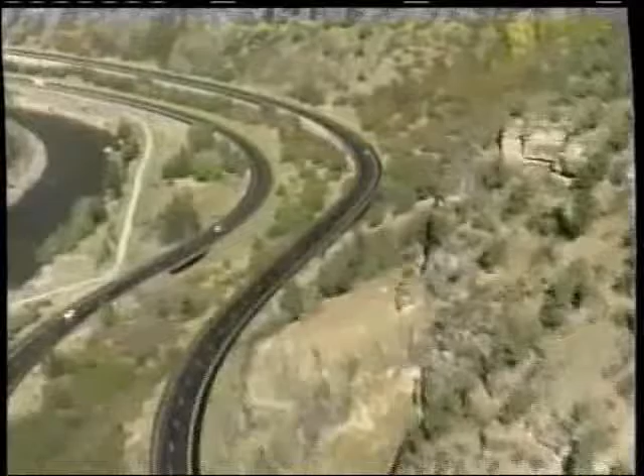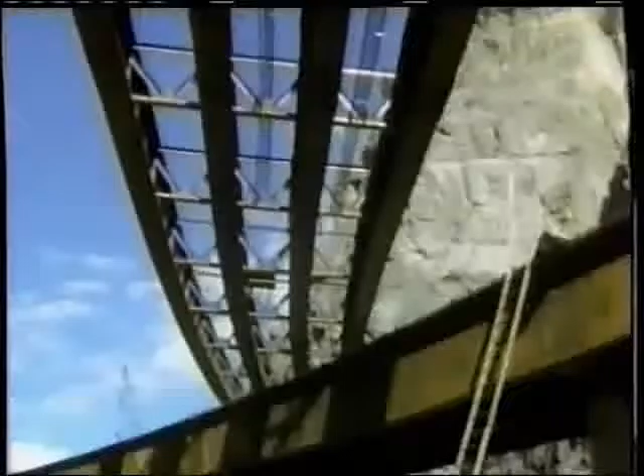Some of these technologies were developed on the Glenwood Canyon I-70 project, which I managed for 12 years. Under my leadership, we aggressively developed and implemented innovative solutions in many areas. Traditional methods and materials would not have allowed us to construct this award-winning project.

Technology does not stand alone. It requires professionals for implementation, problem solving, and continual improvements. We call these specialists subject matter experts. Adoption of new technologies requires support from an enlightened management. We will show you in this video how your agency can both save money and provide better service through internally supported MSE technologies. First, let's look at why agencies are not already implementing these MSE technologies.

There must be reasons why we're leaving over hundreds of millions of dollars on the table each year. There are reasons, and these include the human tendency to resist change, to preserve existing paradigms. Technologies, however, are never static. From the beginning of history, man has pushed the limits of his ability.

In transportation, we began on foot. And then we domesticated animals to carry us farther and faster. We continually improved the efficiency of horse-based transportation and reached the apex of that technology with the stagecoach. We drove the horse to its limits of power and speed. Technologies reach conclusions. There are indeed limits on the envelope. Technologies continue to evolve. New methods and materials replace the old.

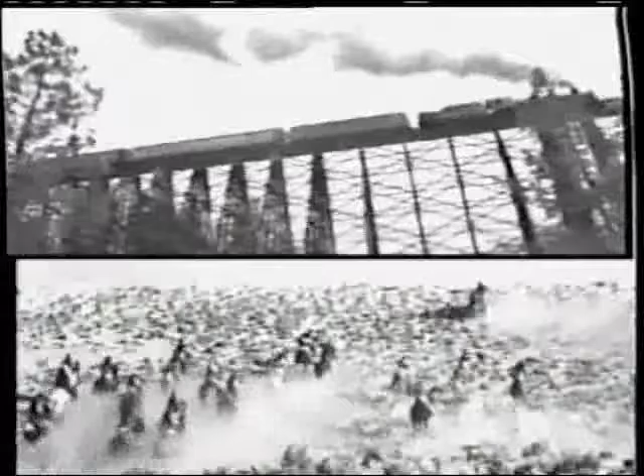The steam locomotive replaced the horse. However, the stage driver was not automatically a locomotive engineer. This analogy illustrates a paradigm shift. Accepted practice in transportation changed dramatically and forever with the introduction of the steam locomotive. A similar technological evolution is occurring in retaining features. These old workhorses are ready for the stable.

Externally supported retaining wall systems are being replaced by internally supported earth-reinforced features. And just as in any major paradigm transition, technologists, subject matter experts, must evolve to advance the new paradigm. Our state DOTs are collectively losing hundreds of millions of dollars each year because they do not have subject matter experts in responsible charge of selection and design of MSE features.

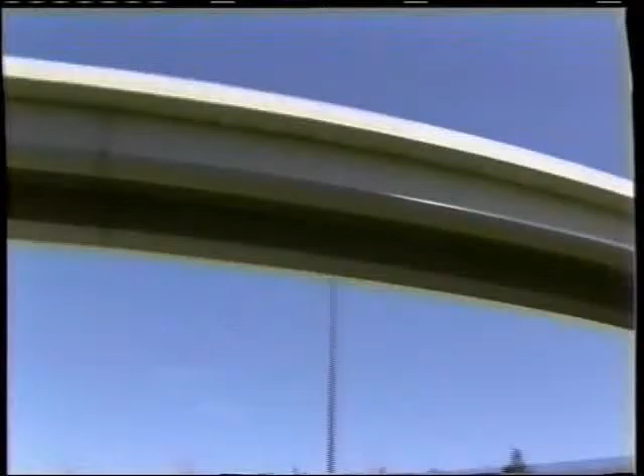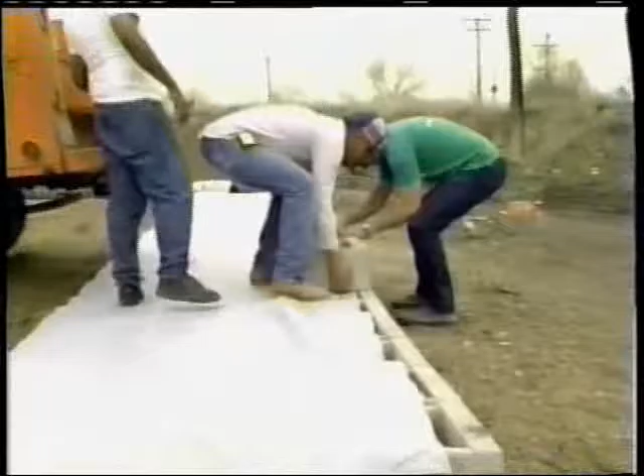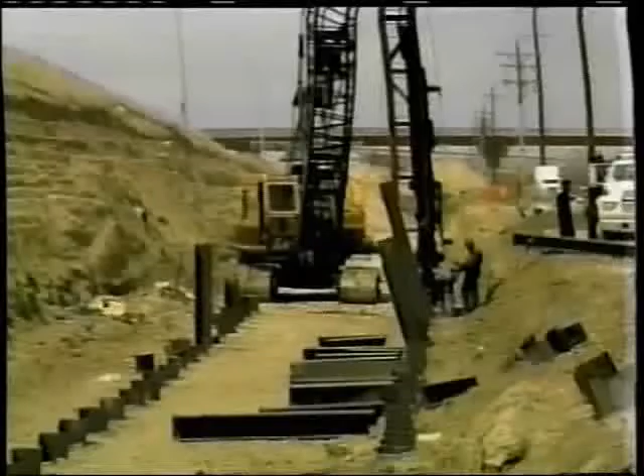State DOT engineers routinely design and supervise construction of these magnificent monuments. Yet few state DOTs can design or support construction of these basic retaining systems. Instead, state DOTs often rely on yesterday's technology or proprietary systems. Here is a cast-in-place wall on piling that cost over $70 per square face-foot to build. A CDOT generic MSE alternative designed in-house would have saved hundreds of thousands of dollars on this project.

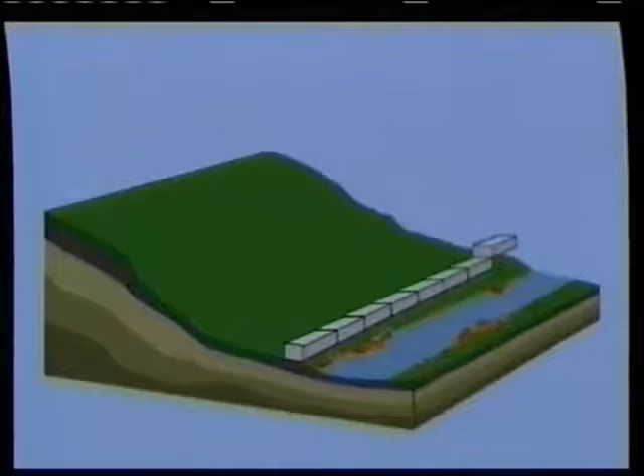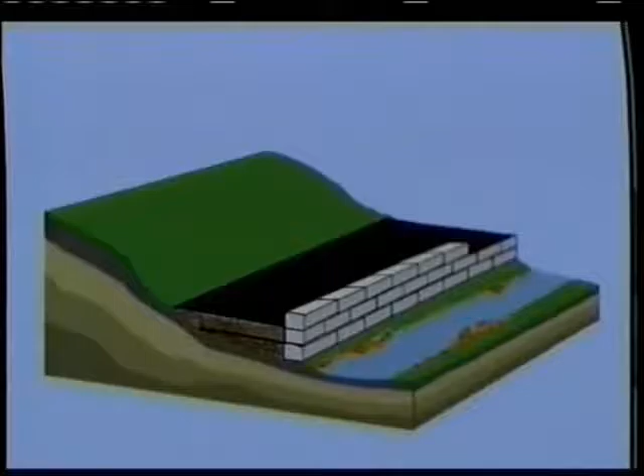These kinds of wastes of public funds become less tolerable as state DOTs realize just how simple the CTI MSE technologies are. There is nothing special, nothing difficult in design and construction of the basic CTI MSB system. Facing can be as basic as a concrete block. The typical backfill is road base. Reinforcements can be steel strips, wire mesh, polymer grids or sheets, any durable material. CTI generic MSB features are the future in wall and slope technologies. The sooner our state DOTs develop internal design and construction expertise, the sooner we begin saving money.

CTI can teach MSB technology to transportation agencies and assist in developing subject matter experts. We have internationally recognized instructors and the finest course materials. The course is designed for engineers who have no formal training in advanced soil mechanics. What we ask of the student is a willingness to learn a new technology and a commitment to use it.

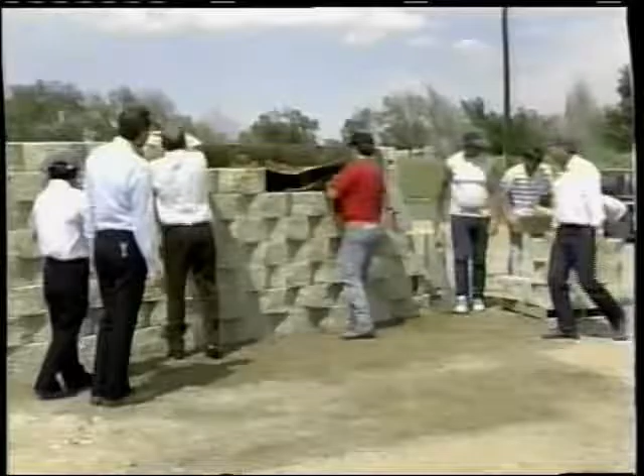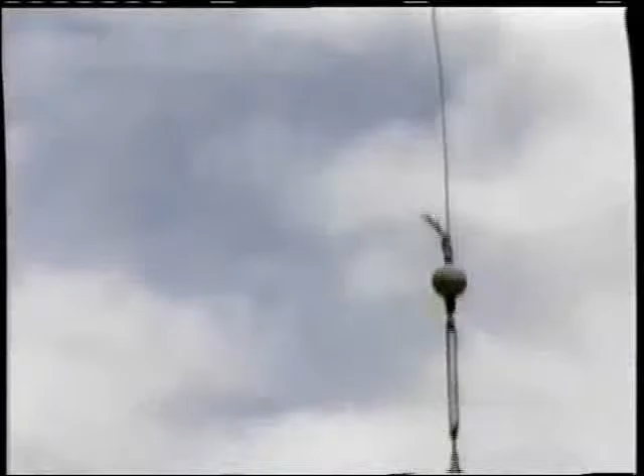This is a CTI MSB generic modular block test wall. We're using this wall to demonstrate the principle of internal stability. On this CTI MSB generic modular block wall, we used two types of facing blocks. We added a surcharge and we cut the connections between the blocks and the reinforcements.

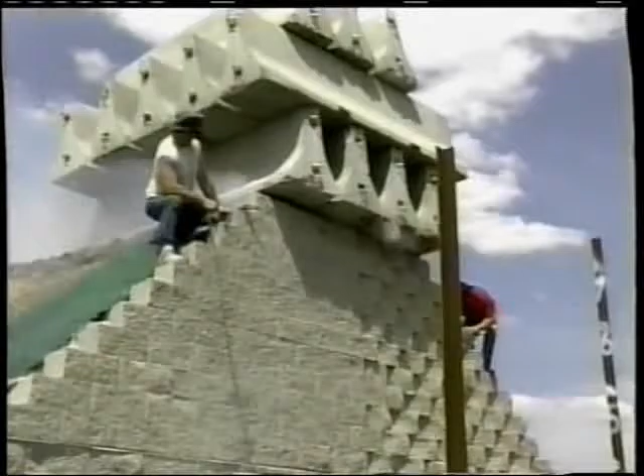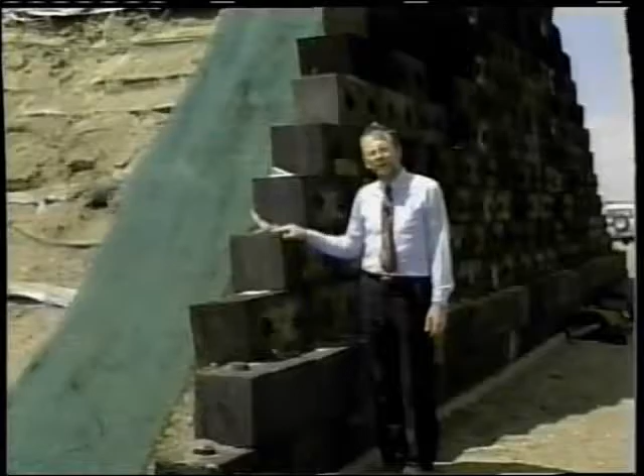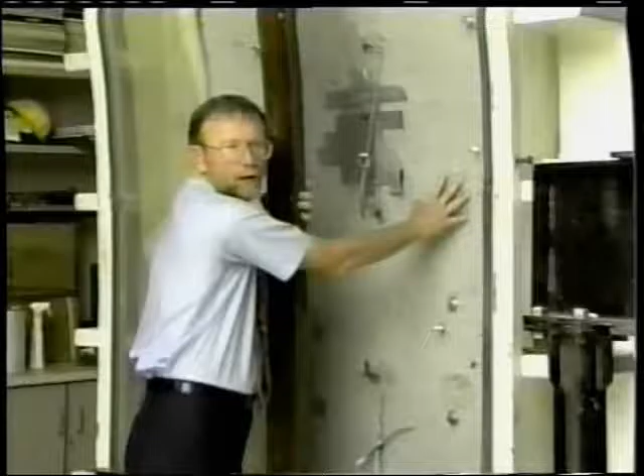This is another demonstration wall. These blocks are made of recycled tires, and they're light, they float. We also cut the connections on this wall. This is our full-scale retaining wall test frame at the University of Colorado at Denver. Here we construct and test CTI MSB retaining walls. The current test includes a full-height concrete panel facade with shredded tires as backfill.

This is our full-scale landslide simulator. Inside, we construct landslides and test various remedies. The current test is a new concept we call the CTI Patch. It consists of a negatively battered fabric wall and tire shred backfill.

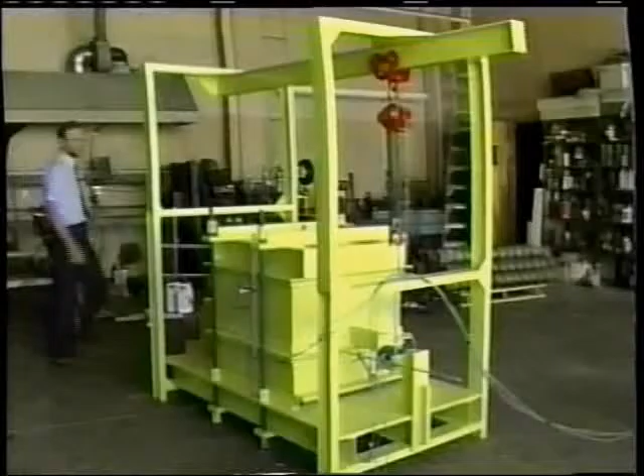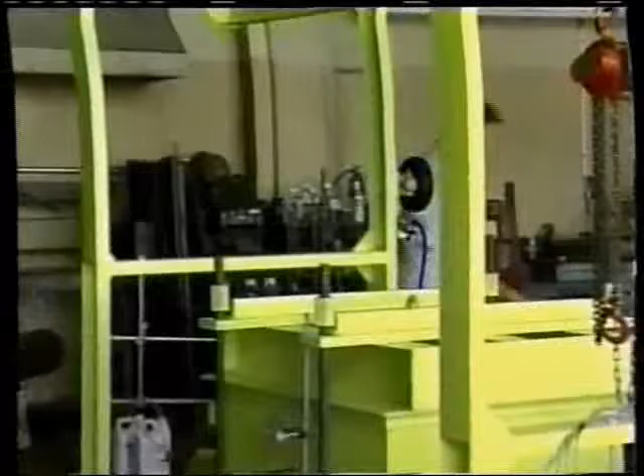This is our direct shear device. It has 30-inch boxes, which allows us to test a variety of backfills, including shredded tires and sawdust. We can also test the interface between reinforcements and backfills. This is a part of the CTI test frame where we test the connection strength between the modular blocks and the geosynthetic reinforcement.

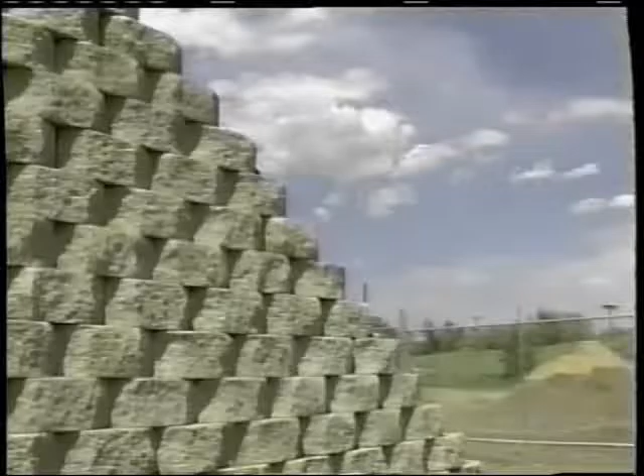What we have learned over the past several years is that CTI MSE technologies are the future in walls and steepened slopes. They represent the next generation in technology. CTI generic MSE systems are simple to design and easy to construct. Let's look at a basic system.

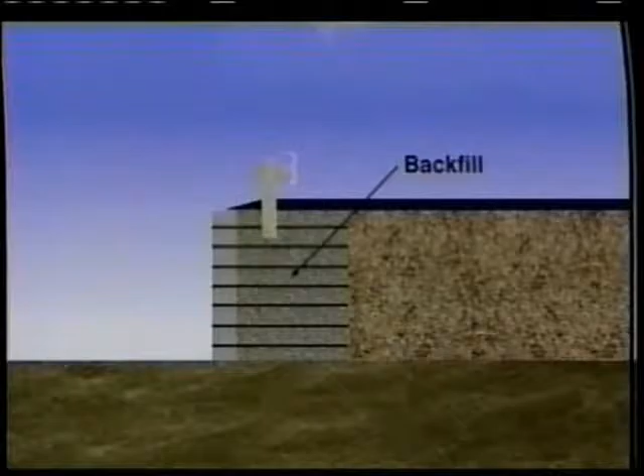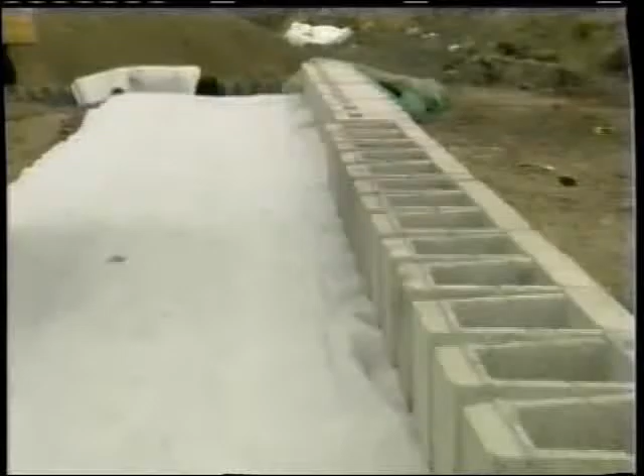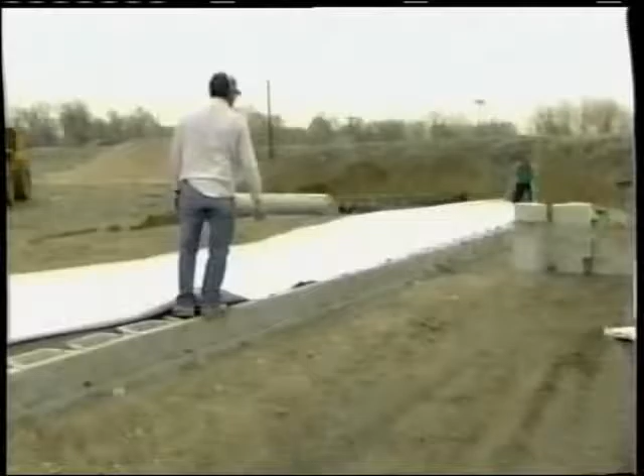Backfill is a granular soil. Road base is a good choice. Everyone knows how to build with road base. The easiest facing for construction is a dry cast modular block. Geosynthetics can be used for reinforcement. Placement is as easy as it looks. Geosynthetic strength, spacing, and dimensions can be determined from the CTI design charts.

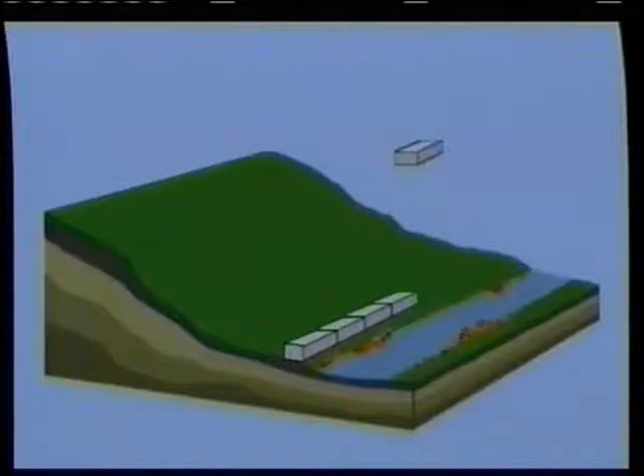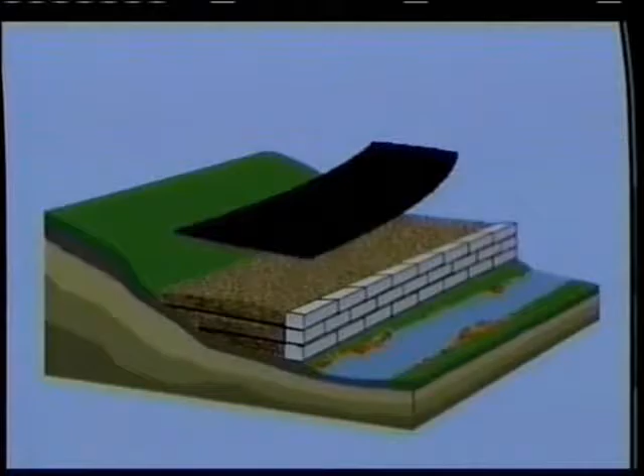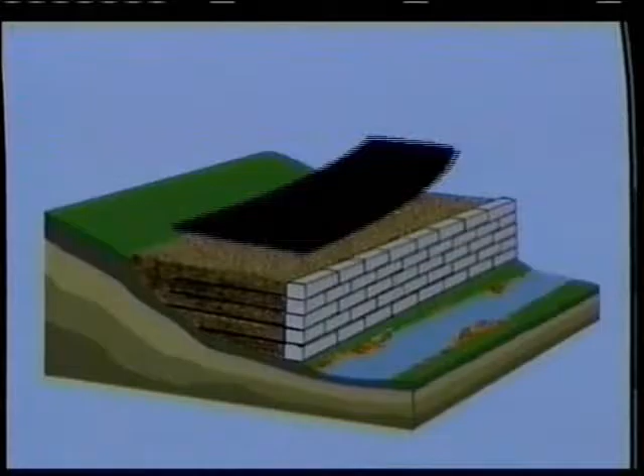Full-scale testing by CTI shows that this composite of backfill and reinforcement is 20 to more than 50 times stronger than the forces that drive internal failure. High-end geosynthetics have half-lives of several hundred years. Dry cast concrete blocks can be designed to last at least 75 years. And road base is certainly a durable construction material. Safety, longevity, and simplicity are the hallmarks of the basic CTI MSE generic modular block system.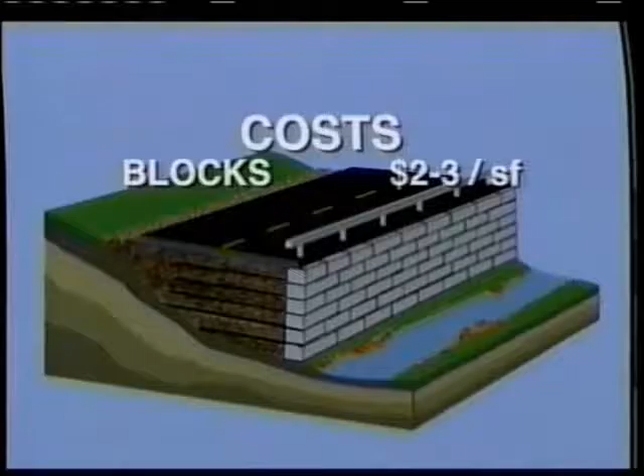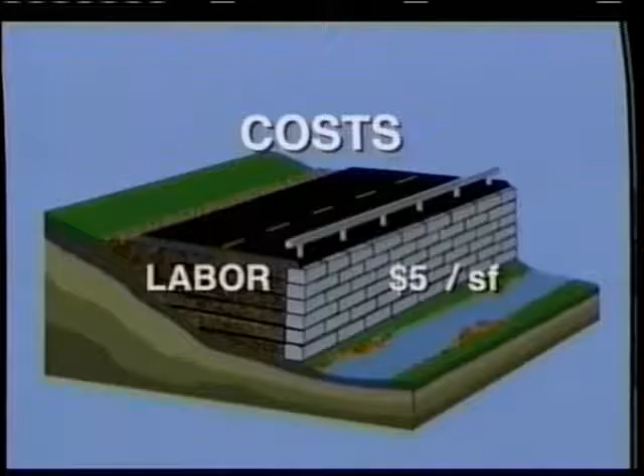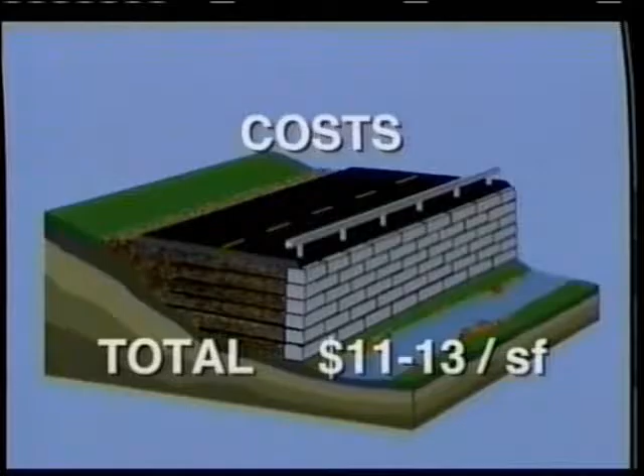Costs for this basic system are quite reasonable. Modular blocks cost $2 to $3 per square face foot. Reinforcements usually cost $2 to $3 per square face foot of wall. Granular backfill is about $2 per square face foot. Labor varies with location, but $5 per square face foot is a fair average for construction costs. At $11 to $13 per square face foot, the CTI MSB generic wall is one of the least expensive systems in the country.

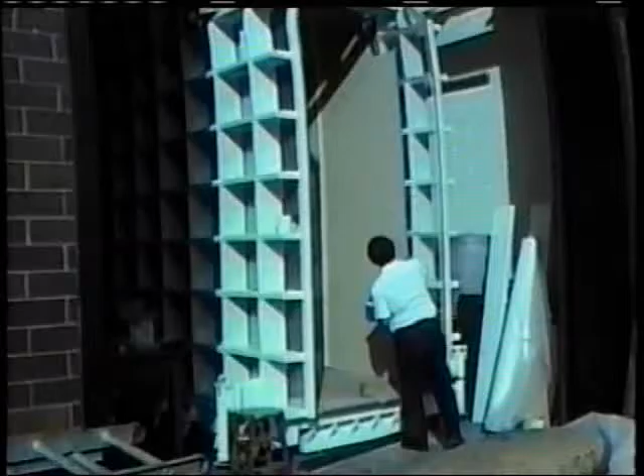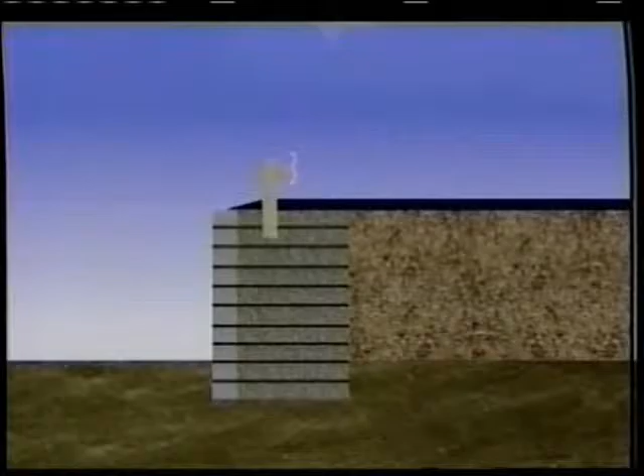The cutting edge of the sword of economy is honed with research findings from CTI and by in-house MSB experts at the beginning of project development. Let's look first at how research has improved the economy of the CTI MSB systems. One of the first discoveries was that internally stabilized features do not require embedment. They are quite content sitting on the ground. While some guidelines suggest embedment of internally supported features, this only increases size and cost. Even a 1-foot embedment adds 20% to the construction. 3 feet adds a whopping 42% to the construction.

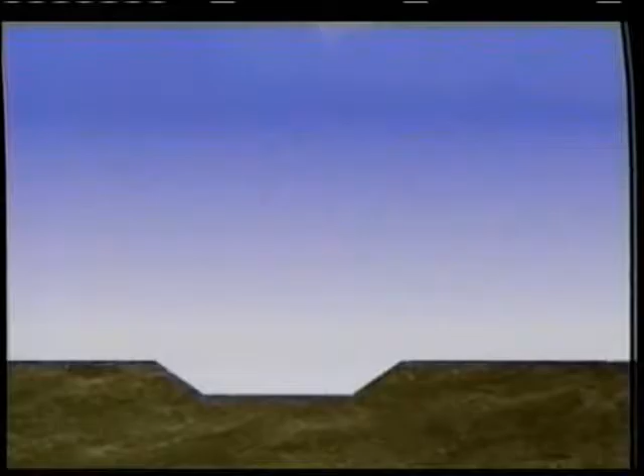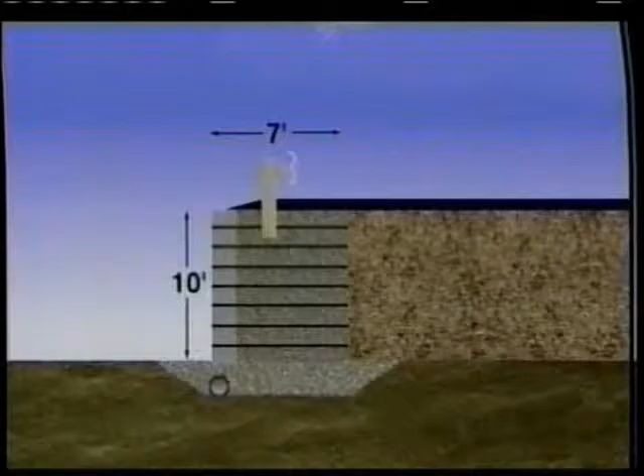Where foundation conditions will not allow the wall to be placed on the existing ground, simply excavate the unsuitable soils and replace the excavation with a compacted granular soil. Then build the CTI MSB feature on the improved platform. For the most severe foundation conditions, the designer may consider adding light reinforcements in the improved foundation. But for heaven's sake, don't waste money on a wider or taller wall than is required. The economies in applications with CTI MSB systems are maximized with in-house subject matter experts who participate from project inception.

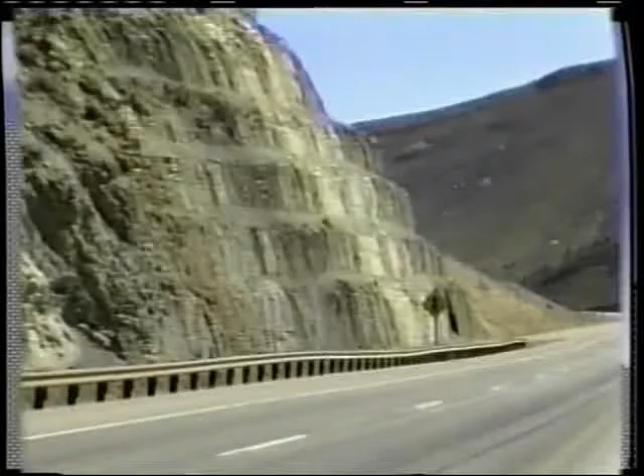Transportation professionals can identify with the iterative process of finding the best fit for a new or improved facility. In this simplified example, the project manager can move the platform to any of several locations. If a cut is to be considered, the project manager uses geotech subject matter experts to determine subsurface conditions and to provide the most cost-effective design. In the case of bedrock, steep cuts can be used. But if the hillside is subject to landsliding, disaster could occur. The project manager would not leave the responsibility for design of this all-cut cross-section to vendors and contractors after the project has been awarded. This is not always the case with an all-fill section.

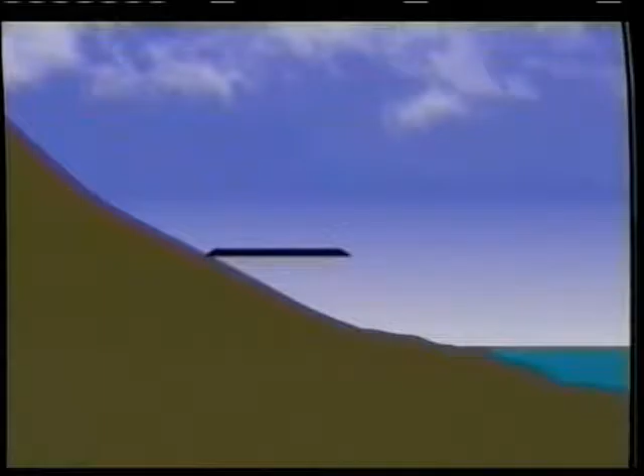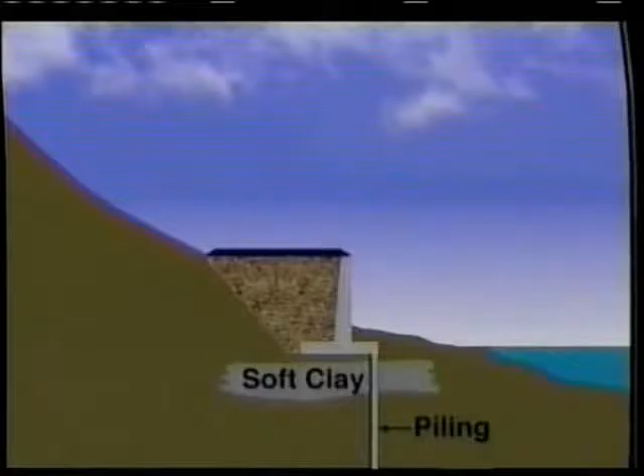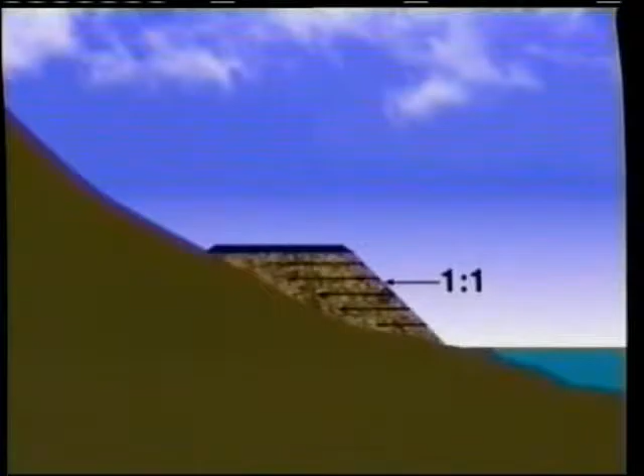Most state DOTs do not have MSE design expertise, and they are likely to follow one of 2 courses of action. In the first case, they will design what they know, which is usually a concrete cantilever wall. And if the subsurface conditions are unfavorable, the traditional designer will underpin the traditional wall. These constructions are fiendishly expensive, often 3 or 4 times the cost of MSE solutions. What can be missed without in-house expertise is the least expensive option, a steepened slope.

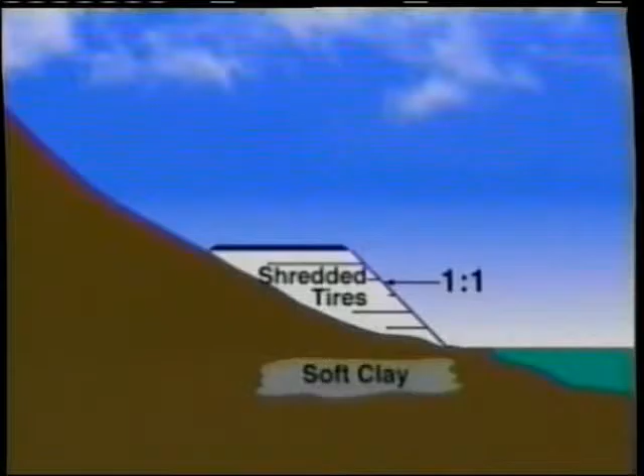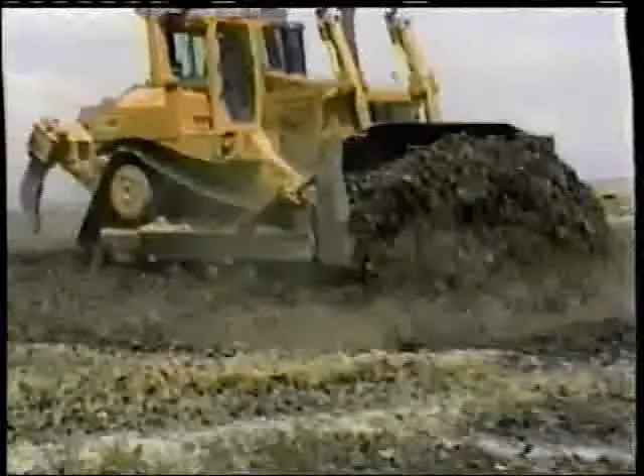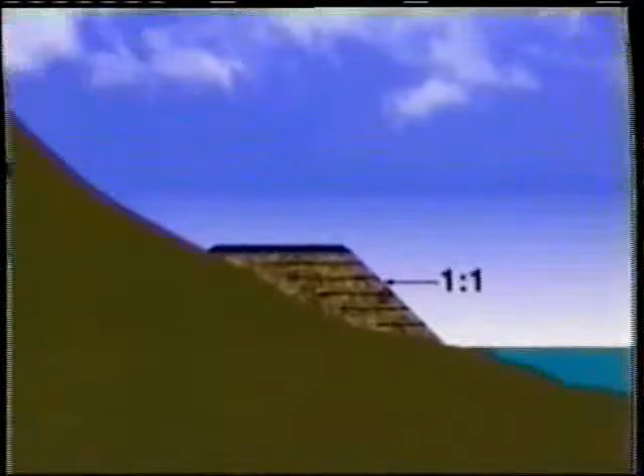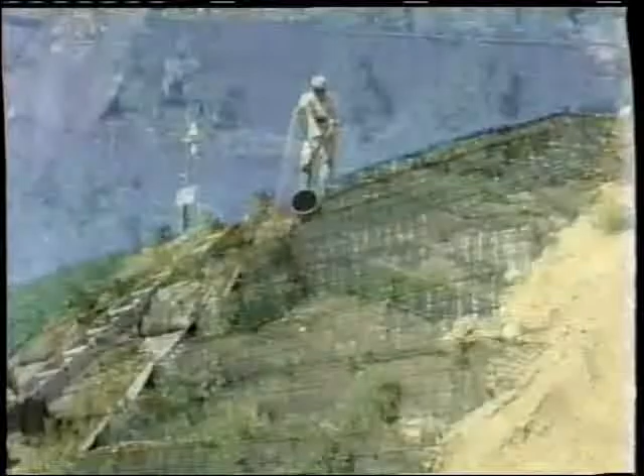And if the foundation is weak, then MSE designers can use durable, lightweight fills such as shredded tires. Shredded tires make a good backfill for walls and slopes. Sawdust can be used as backfill. Expanded polystyrene is an excellent construction material. These modern designs take advantage of the principle of internal stability. No facing is needed except to prevent erosion. Several systems are available to reinforce the backfill and prevent erosion. This steepened slope demonstration project is a joint venture of CTI and Tensar Earth Technologies.

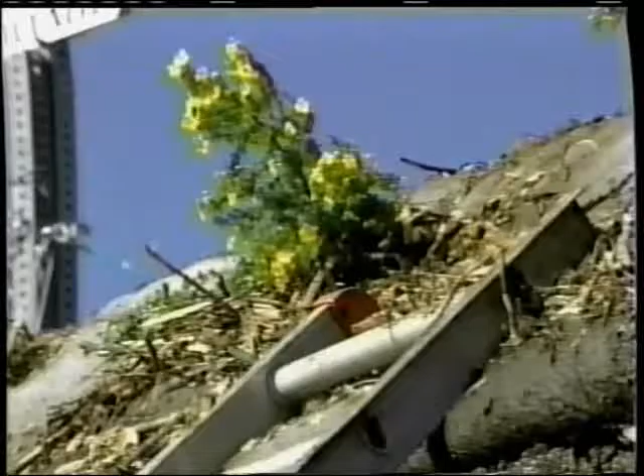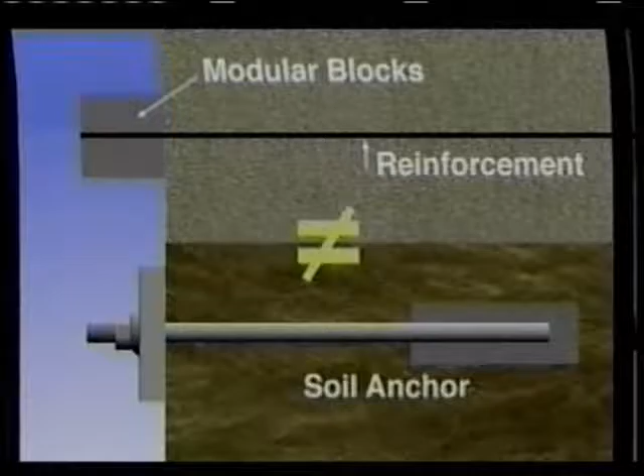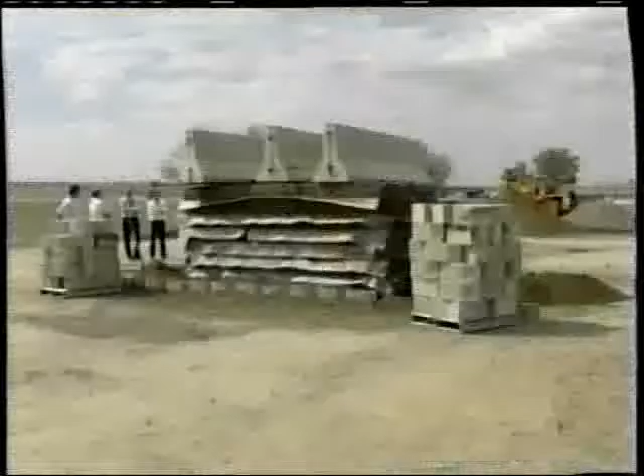The principle of internal stability can be illustrated by comparing a soil anchor with a segment of reinforced earth. If the nut of the soil anchor fails, the system fails. Whereas the most important role of the facing block on the internally supported system is preventing erosion. Reinforced steepened slopes and walls differ only in the angle of the face. Once the angle of repose of the backfill material is exceeded, the reinforcements take most of the horizontal load.

The other choice a DOT may make is to simply draw a vertical line and leave the solution to contractors and vendors. This avoidance of responsibility denies the project manager the assistance of subject matter experts in wall selection during project development. An approved list is no substitute for internal expertise.

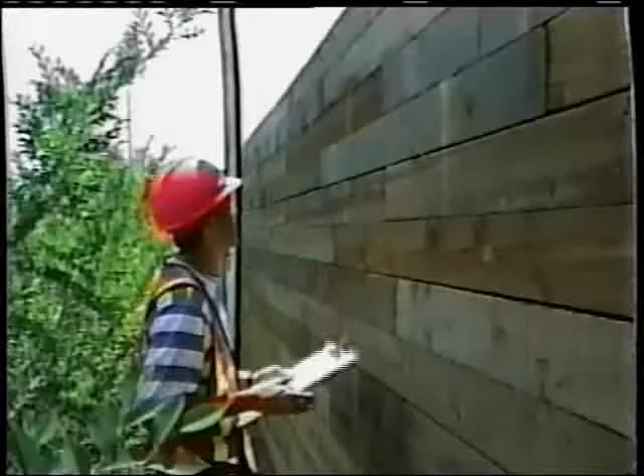Put the DOT people to work. Let them assume an ownership role and advance the MSE technologies. Our DOTs have capable engineers who would rather be self-reliant. Research pays off only when it is implemented. Let's look at applications of CTI MSE technologies.

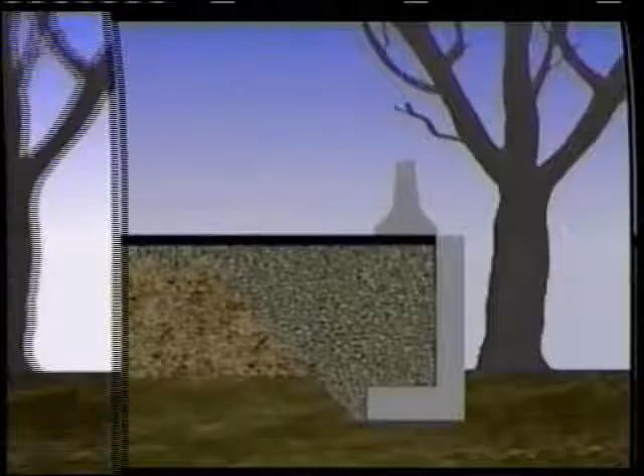CTI MSE subject matter experts provided a solution to this space constraint that a contractor probably could not. A highway widening was requested by a township, and they also wanted to save a grove of trees. A traditional, externally supported system would have damaged the trees. Any embedded system would have damaged the trees. A CTI MSE generic wall was the optimum solution. A truncated base was selected to minimize traffic disruption, and the wall did not require embedment.

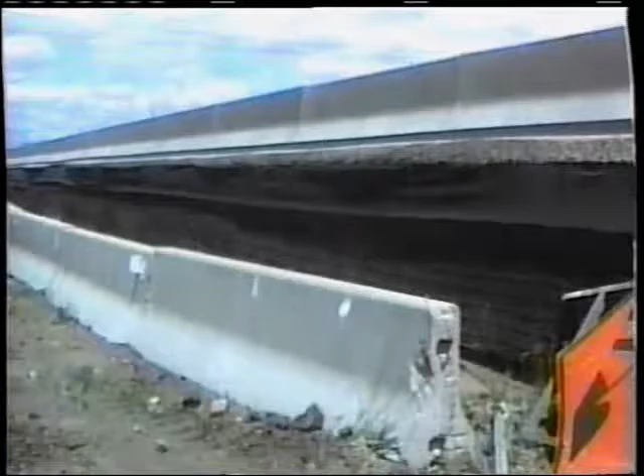A state DOT saved at least $1 million with non-embedded MSE walls over an industrial site that was known to have contaminated soils. Externally supported walls would have required excavation into those soils. Thousands of feet of these temporary walls were constructed. Milled asphalt was used as backfill. This one project will pay for the MSE generic design squad for years to come.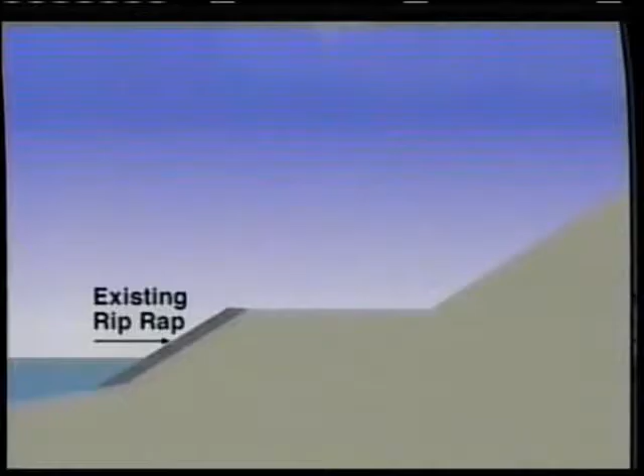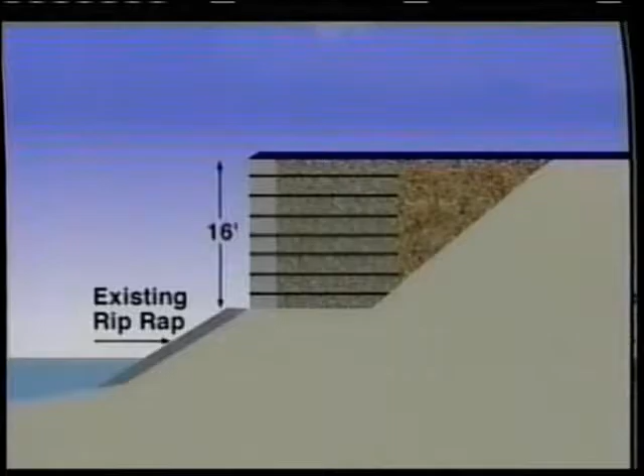Here is yet another example of saving hundreds of thousands of dollars on a single project. Transportation professionals will appreciate the differences in time as well as cost between these two constructions. This CTI MSB generic system on this project utilized timbers for forming and facing. These treated timbers are approved for house foundations. Embedment was a nominal 2 inches.

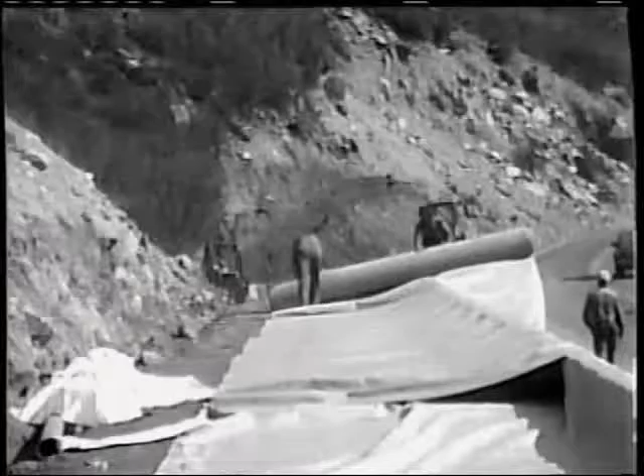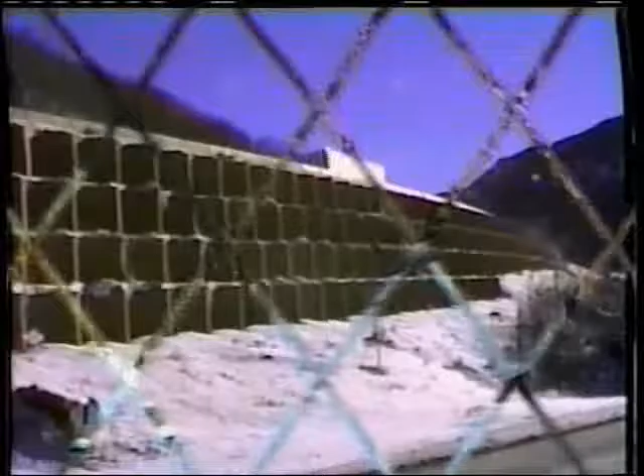Geosynthetically reinforced road bases and wall backfills have been used all over the world for many, many years. There are tens of thousands in service at this time, and there are hundreds under construction at this very moment. Mechanically stabilized backfills are the future in retaining walls and steepened slopes. MSB systems are versatile and can accommodate many facades.

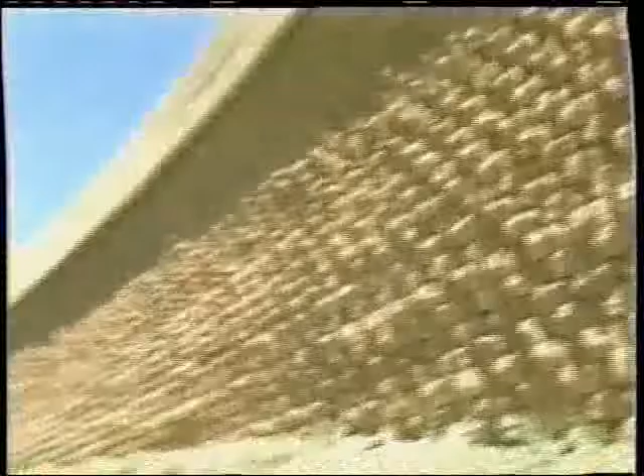CDOT has adopted internal responsibility for MSB design. We proved through a trial implementation program that millions of dollars can be saved each year in Colorado with this technology. The paradigm shift isn't easy and requires a commitment from the top down. MSB technologies are the future, and the Colorado Transportation Institute can provide a valuable service in moving up the ladder of technological advancement.

All of us in transportation are aware of the shrinking dollars. Our maintenance efforts just aren't going to be able to keep up with the deterioration of our infrastructure. We're losing the battle to preserve our roads and bridges. But we have to find new solutions. Raising taxes and doing business the same old way won't fly in today's political climate.

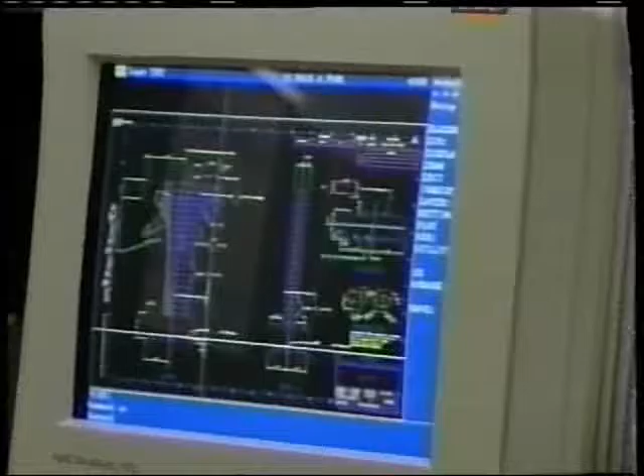All of us believe that research pays off, but just doing the research isn't enough. Here at the Colorado Transportation Institute, we stress it's the implementation of research that really starts to pay off. Research is an abstraction. Few of us in our DOTs actually perform research. Instead, what we do is implement research findings using the new and better technologies.

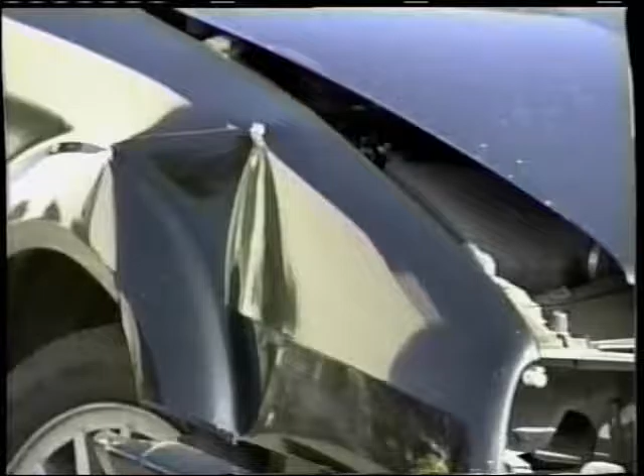Of course, we can't blame today's accidents on yesterday's design choices, but we do know this. The decisions we make today, say to use the CTI generic retaining walls, can save money, and that money can be invested in the future, in finding ways to reduce accidents, in improving our pavement quality, in rebuilding old bridges. That's the value of savings.

How do we communicate the value of savings to our design groups, to our construction forces, to our maintenance crews? It begins at the top. Top management holds the key to doing our jobs more efficiently. We're the ones who set the direction and allocate the resources for this department. This is why here at CDOT, we encourage all our engineers to use new and better technologies. This is why we encourage them to use CTI generic walls.

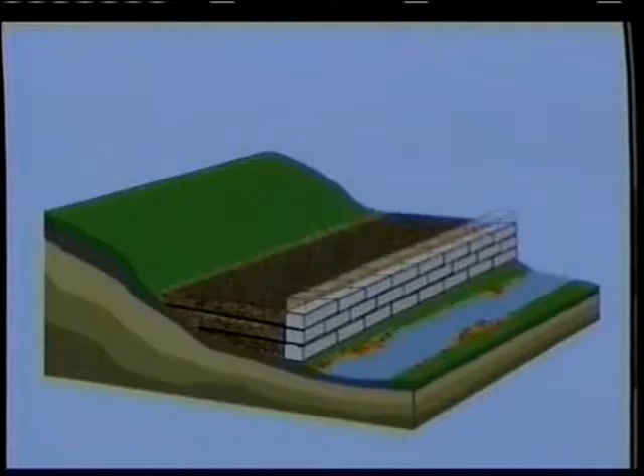Top management can provide the bridge, the connection. CTI's generic MSE walls can save DOTs hundreds of millions of dollars a year. And we'll support your staff so you can indeed fully realize these savings. We'll help your staff become self-sufficient, design in-house, support construction crews in the field. But it's up to top management to facilitate this training, to facilitate